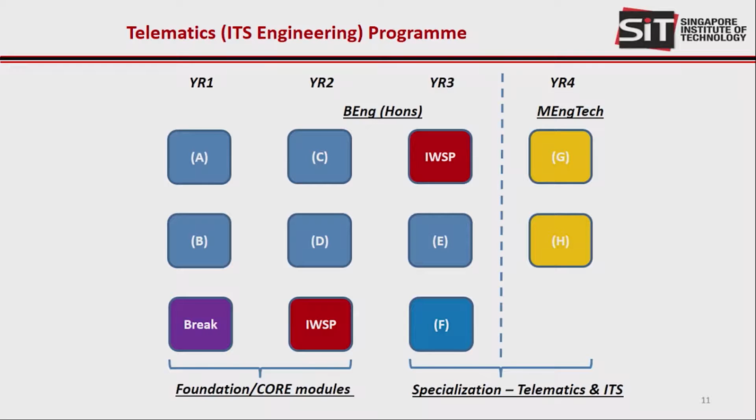Yeah, we want to work with NI. Basically, NI provides an integrated solution of hardware and software, which is very useful to develop many modules for the telematics program, such as signals and systems, embedded system design, and wireless communication.

And also, NI has many industry partners, called NI partners. Our students can work with NI partners for the IWSP and also for various projects, and the students can develop innovative products and solutions for these companies.

And also, our students will get training to obtain the LabVIEW certification, which is an internationally recognized certificate, and they will get relevant industry experience. We are going to sign an MOU with NI later today.

This MOU covers quite a number of important topics. The first one is certification and software. Basically, NI will provide training for the LabVIEW Core 1 and Core 2, and all students will go for the CLAD and CLD examinations. SIT will be the first university to set up a LabVIEW Academy in Singapore, and also the first university to have students go for the CLD exam.

NI will also organize technical sharing sessions for our faculty and students. NI will sponsor industry awards for students doing well in their projects using LabVIEW. NI will also support SIT programs such as the dual study, IWSP, and capstone projects through the NI partners. Thank you very much for sharing, Prof.

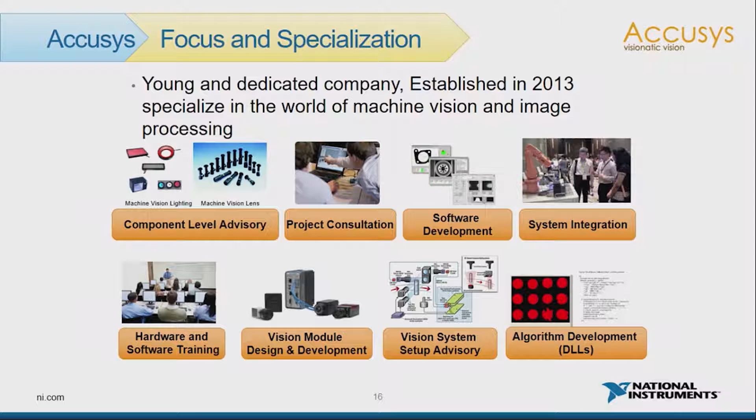Thank you, Winston. Within 3 years, you have managed to build such deep capabilities in machine vision. This is truly impressive. Would you be able to share with everybody an application you developed recently, and what were some of the challenges you experienced?

So we have one of the projects we've done recently that I would like to share. We have a customer who makes electrical grooming products, for example electrical shavers, electrical trimmers. Before the assembly process starts, parts need to be lubricated by dispensing lubricant on them. The challenge faced by the customer was that the whole process was being done by human workforce, which introduced a lot of human error into the process. Other than that, the manpower also limited the production throughput of our customer.

Our task in this project was to automate the dispensing process by implementing robotics vision. There were some challenges we faced as well. For example, the deployment error was actually very high with human traffic, there was unfavorable ambient light disturbance, and we had a very small deployment area. We were also given a very short development time, and we encountered some communication issues with the robots.

These are truly challenging times. So Winston, what is the solution that you actually developed, and how did you manage to overcome some of these challenges? Yes.

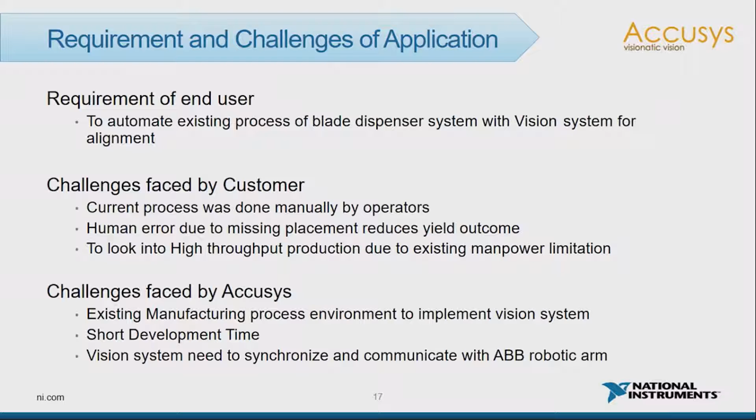Our solution is to choose Vision Builder from the NI Vision platform together with LabVIEW. The software we have written runs within the CVS controller from NI. This controller is responsible for image capturing, image analysis, image processing, I/O synchronization, and TCP communication with the robots. So when the result is ready from the CVS controller, it will send a string of TCP phrase to the robot, and the robot will perform the dispensing action.

Thank you very much, Winston, for sharing with us the configuration of the application you were describing earlier. I must also say that this slide is one I like pretty much. It has the NI Compact Vision System, the NI LabVIEW software, and the NI Vision Builder for automated inspections, which is a script-based configurable software that NI provides to engineers and scientists who want to rapidly prototype machine vision applications.

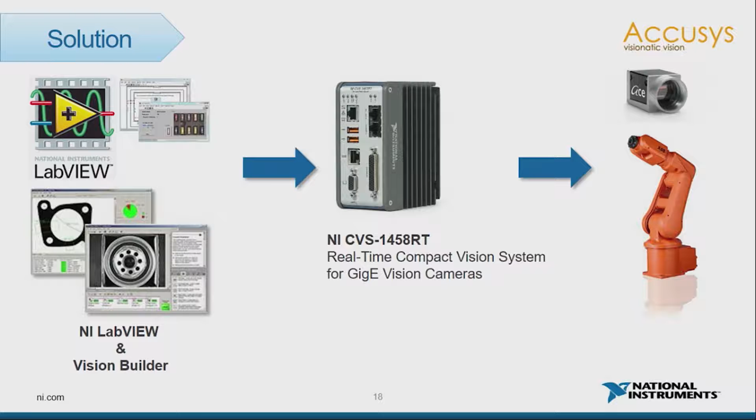Having shown this, do you have a video to show the audience about how the physical system deployment looks like? Sure, in fact I have two videos here. You can already see the image has been captured, the result sent to the robot, and then the robot performing different dispensing actions onto the unit. One can notice the same program is applicable to different parts, different models, and different unit counts on the tray. This is on two different occasions, but with the same system.

When we place the unit, the target, onto the tray, we capture and then analyze all the positions of the unit. This is a screen of the VBAI deployment.

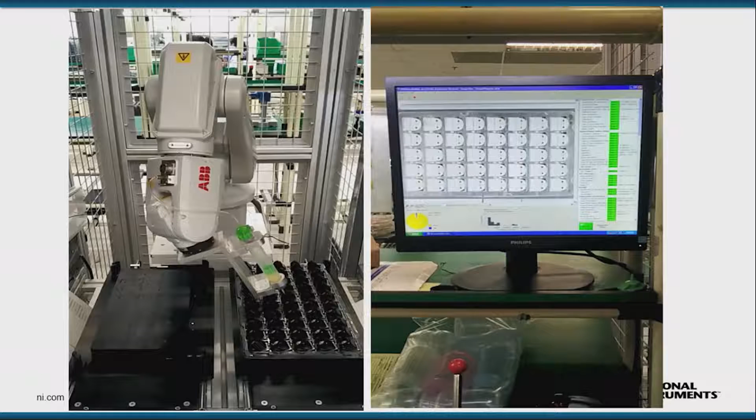I see, thank you very much, Winston. I mean, you are really great — I asked for one video, you show me two videos. With all the complex systems we've seen in this video, I am very sure there are challenges you face while developing it. Will you be able to share some of these challenges you face specifically when working on this application?

As you can see from the video, the vision processing part is performing pretty well, and we are able to cater for all the different parts. But we do encounter one challenge whereby we need to send a very long TCP phrase to the robot side. These phrases differ in length from model to model — about 1,000+ characters — and need to be in a very specific format to be recognized by the robot. The phrase consists of, for example, a header, model information, unit count, followed by maybe 50 or 80 parts of pass/fail information, XY location, angular rotation of the part, and ends with a footer. To do this in Vision Builder is actually a very tedious project.

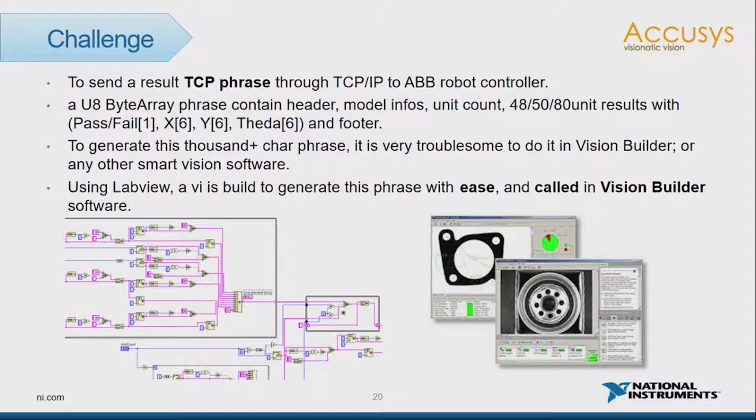In fact, to do this in any smart vision software is a very tedious process. Our workaround was to implement a custom VI function from LabVIEW that we built, and job done. This step actually took us around 20 minutes to develop this custom function. So by using the NI platform, we achieved a very great time saving in development time, from months to weeks. In fact, the vision part you saw in the project just now was done within a week's time.

The next point is one thing I really like about NI. From my point of view, NI is one of the few companies that provides customers with a development environment — namely LabVIEW, a Vision SDK named VDM, and Vision Builder in the NI ecosystem — and also vision processor hardware. So as a vision system developer, this felt like a complete combo meal ready for us.

Next, I also have one piece of feedback from our customer that I'd like to share — he mentioned that the automation system helped us improve our yield and reduce human error. In future, we are looking to expand such a system to other processes.

Winston, at this point in time, I'm very tempted to ask you the next question. Can you share with everybody how the NI platform has enabled you to attain a competitive edge in the industry?

Yeah, so there are a lot of different third-party products or competitor products out there. It depends on the nature of the project — we might choose VDM for that project, the Vision SDK, or Vision Builder for that project, which is actually a smart vision software.

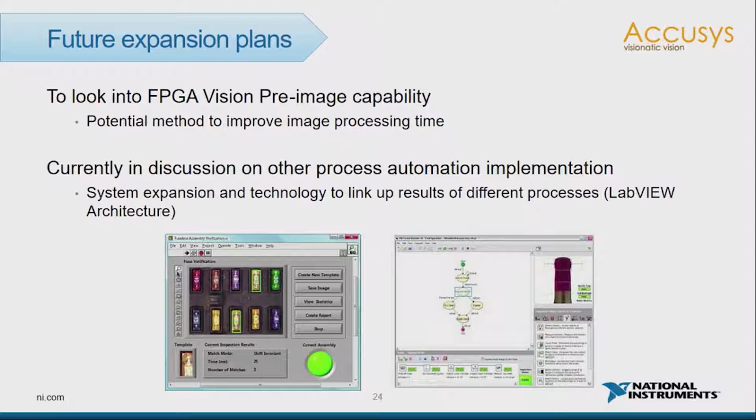Now, the third speaker that I would like to invite on stage is from ARTC - Advanced Remanufacturing Technology Center, or ARTC for short. It is a platform built upon strong partnerships across the supply chain, complemented by technical support from research institutes as well as academia. Purposely built facilities, underpinned by world-class research expertise, hope to help rapidly develop solutions that can enable this technology to be deployed into industrial production.

So with that, I would like to invite Dr. Chen from ARTC to share about one of his latest applications that ARTC is working on.

Hi, Orange. Good afternoon, Dr. Chen.

Hi, my name is Chen Fang from ARTC. Right, very nice to have you here, Dr. Chen.

Now, before we jump straight into what are the challenges that industry are facing and how ARTC are coming in to work on it, can you also share with us a little bit about the mission statement of ARTC, and also a little bit about ARTC in general?

Sure, my pleasure. ARTC is a business model, both private and public. We are under A-Star in collaboration with NTU, and we are also working closely with our industry members like IHI and Rolls-Royce. Currently we have 42 members which cover both the technique end user and the provider. We have 5 main teams: repair, restoration, surface enhancement, robotics, additive manufacturing, and product verification. Currently we are working closely with NI mostly under product verification, developing solutions of inspection, machine vision, NDT, and other measurement projects.

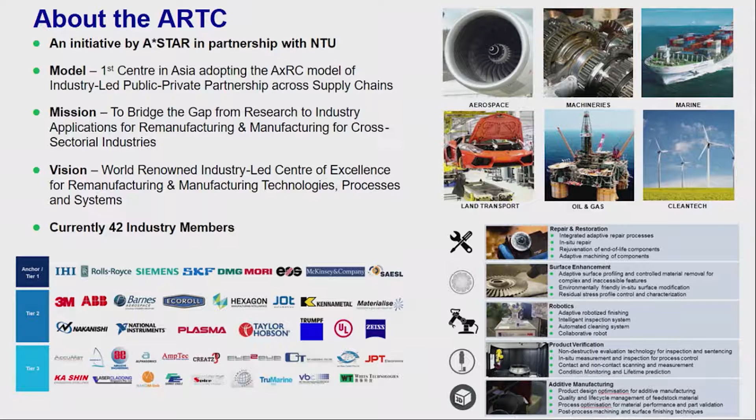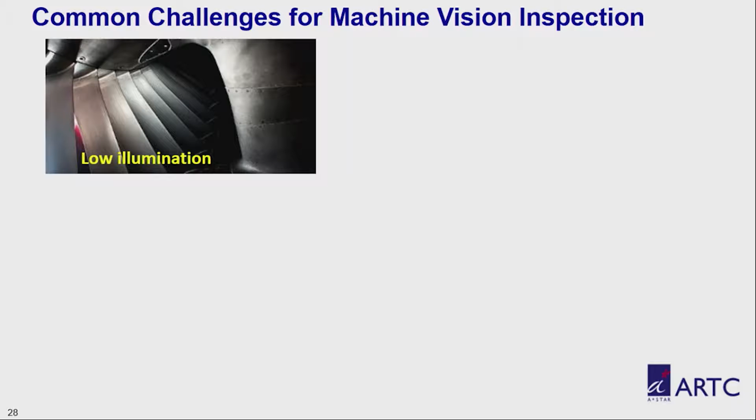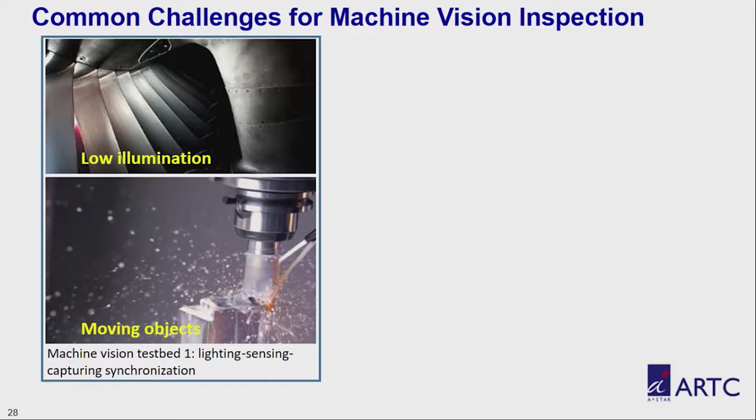Because we are serving so many industry members, today I'll share some of the common interests from our industry members. For example, for machine vision, we have common challenges if the illumination is low, or if the object is moving, it's even worse. So to settle these problems, we are developing our test bed 1 to synchronize the lighting, the camera, and other sensors into one system.

Sometimes we feel it's quite important to replace human sensing with our algorithm, meaning we do some artificial intelligence work. Human beings sometimes make very reliable decisions, but sometimes subjective ones, so we need to transfer the knowledge from experienced technicians to our system. Human beings are quite clever - we know this image is a very poor quality image, but we know where is black, where is white. But we need to do the pre-processing for the system to do machine vision image processing, and it's always time-consuming and needs quite a lot higher requirements on computing power. So based on these considerations, we developed our second test bed to address dynamic inspection with intelligent decision-making.

Thank you very much for sharing about some of the challenges that the manufacturing industry are facing. Now, can you give us a deep dive on these 2 test beds that you just shared with us?

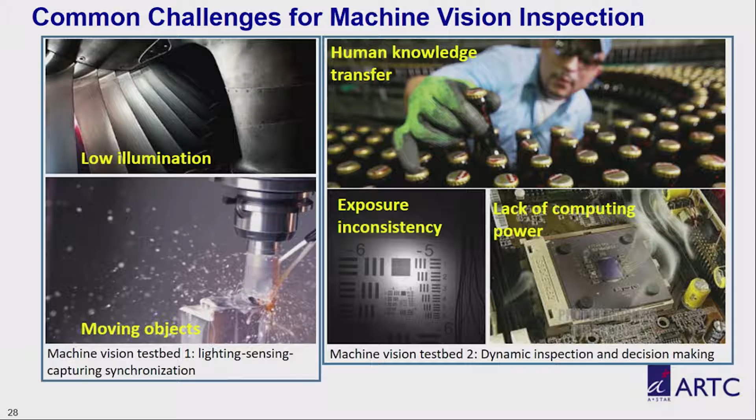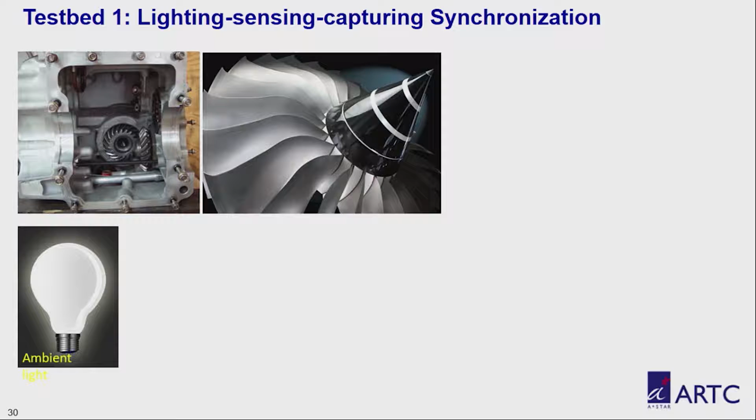Okay, so our test bed 1, we are focusing on synchronization. As you can see in the casing or in the gearbox, sometimes the illumination is quite low and sometimes the object is moving very fast. So we need ambient light for observation purpose or for video taking, and for a high quality image we need some special lighting to make a uniform and very short pulse lighting.

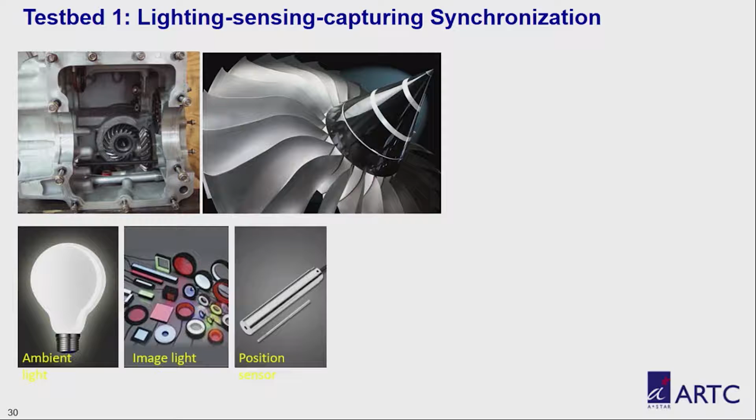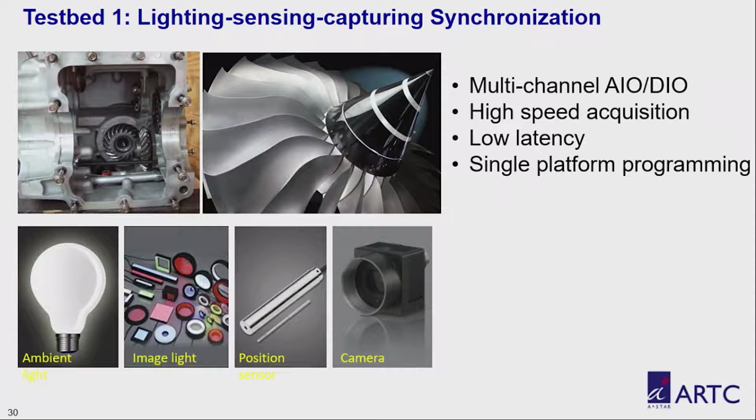And we also need position sensors to make sure during the very short time we capture the image, the object is rightly in the center of our field of view. And of course, most important, we need an image capturing system. We have requirements of high speed, high throughput, and as a developer we always prefer a single programming platform. So in this development work, we use LabVIEW and a portable DAQ system to synchronize everything.

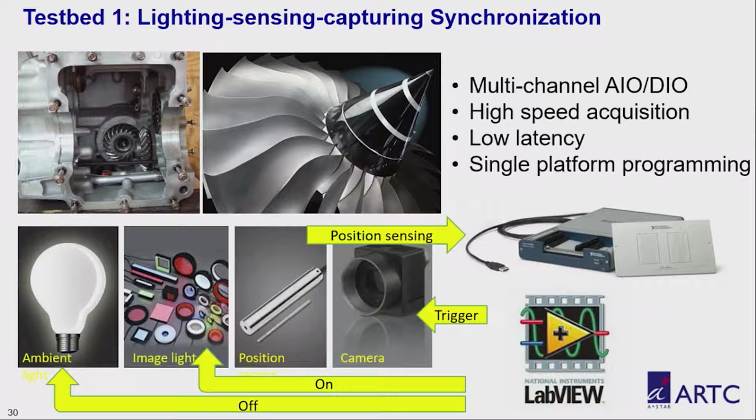The system reads the signal from the position sensor, knows that this object is within our shooting range. Then we turn off the ambient light to terminate the observation mode, then we take an image using the camera with assistance of some special lighting. Okay, this is how the system works.

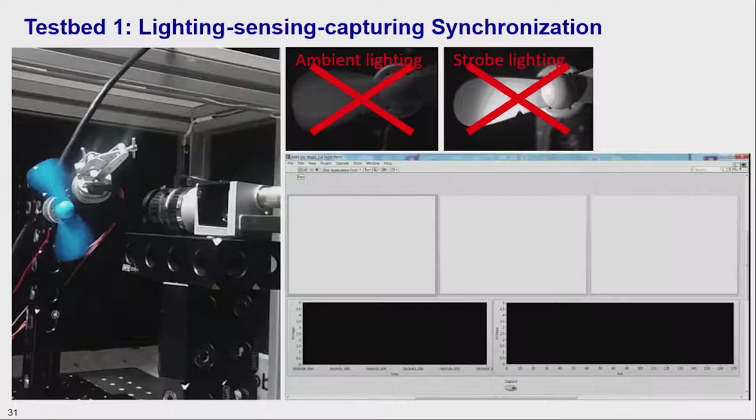If we use ambient light to take an image, the image will be very dark and blurry. If we use some flash directly attached to the camera, the illumination is not uniform. So they are not suitable for machine vision, for image processing. We need some specially reconfigured lighting system to give us a high quality image.

This is how the system works. As you can see, we terminate the observation mode, then run the image processing mode. And another software panel will show you how we take the image.

Okay, this is the video. Every time the image is taken, the center of the object is within the central area of the image. That means our position sensor works. And as you can see, in real time, the defect can be detected. So all the sensors, multiple lightings, and cameras are synchronized in this system.

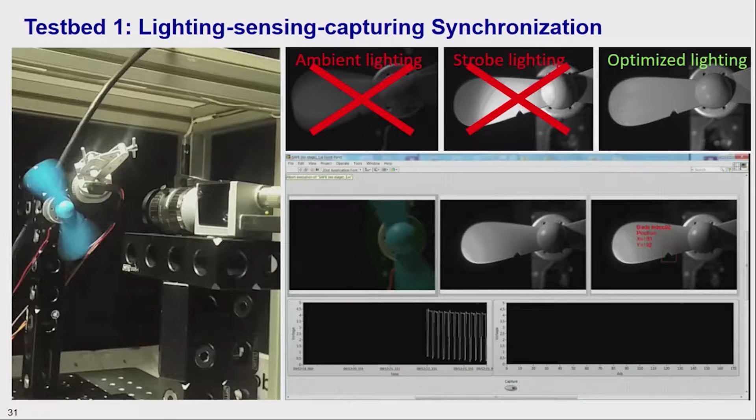Very nice, Dr. Chen. Now you are going to go about test bed 2 - I realized that one of the differences between test bed 1 and test bed 2 is that there's intelligence in test bed 2. Yeah, so for test bed 2, we are pursuing not only to be fast, but also to be smart.

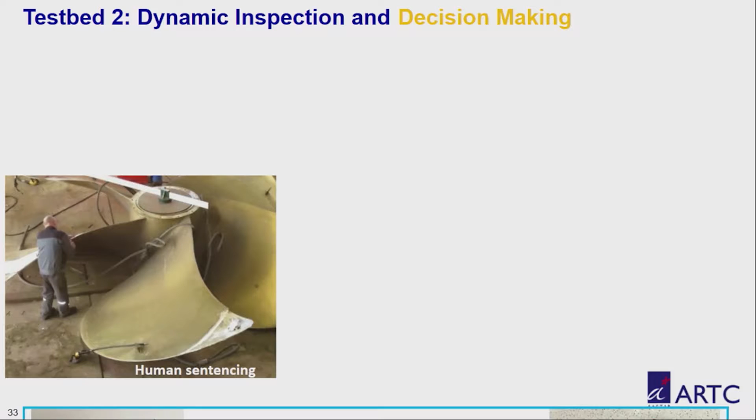Okay, as you can see, this is a common story of human sentencing. This technician can be very experienced. Using his eye, he knows which samples to be accepted or rejected. For example, if the surface is perfect, we accept that. If the surface is full of these corrosion dots, we reject it. And sometimes the cases are in between - we should make decision whether it's worth repairing or not.

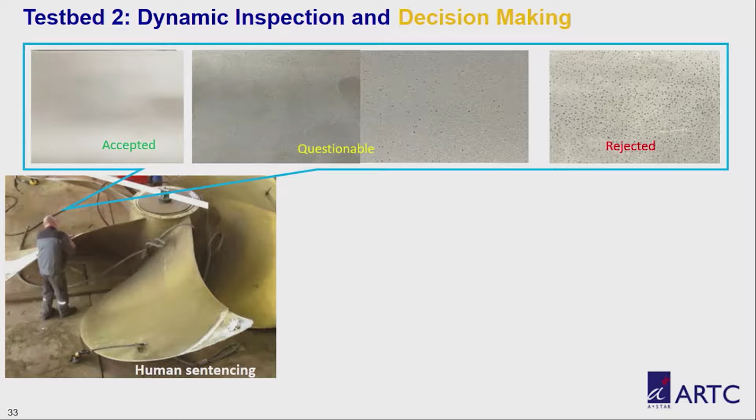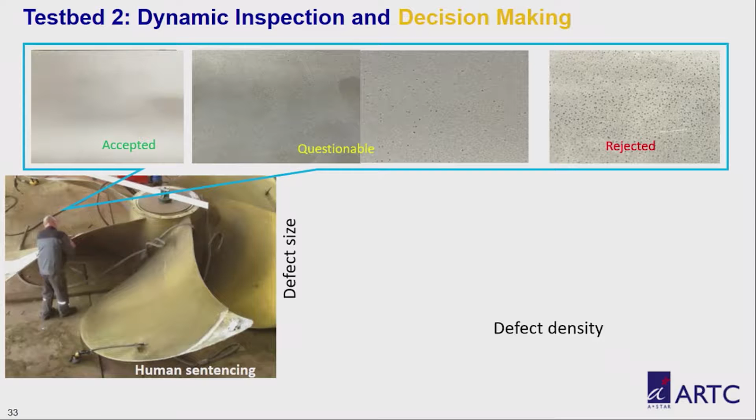So we need to transfer the knowledge from the human being, the brain, to our algorithm. We extract two key parameters, which are the defect density and defect size. As you can see, the yellow points mean we can accept that, and the red cross means those cases we should reject. This is the decision made by the technician.

As you can see, the triangular area is what we draw using our algorithm, meaning this area is the acceptance role. And be careful, on the bordering area, we have some outliers there - that means our human sentencing is not always consistent. Right, okay.

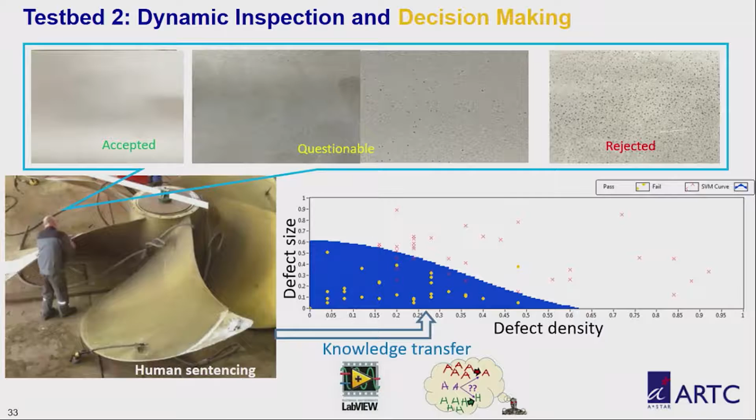To be clearer, these criteria can be translated into different failure modes, which shows a clearer physical meaning. As you can see, we can separate that into a 4-cell matrix. Firstly, if the defect density is low and defect size is small, we accept that.

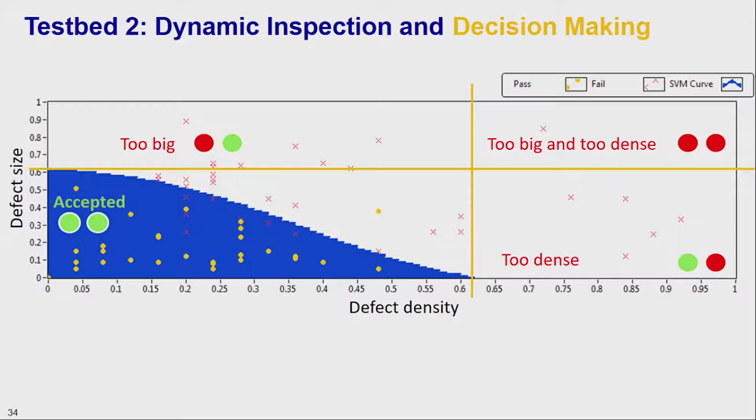If it's too big, no matter how low the density is, we reject that. If the defects are too dense, no matter how small they are, we reject that. And if both dense and big, we reject them. We have a special area in this triangular region - we reject it because we feel uncomfortable. Why uncomfortable? It's fairly big and fairly dense.

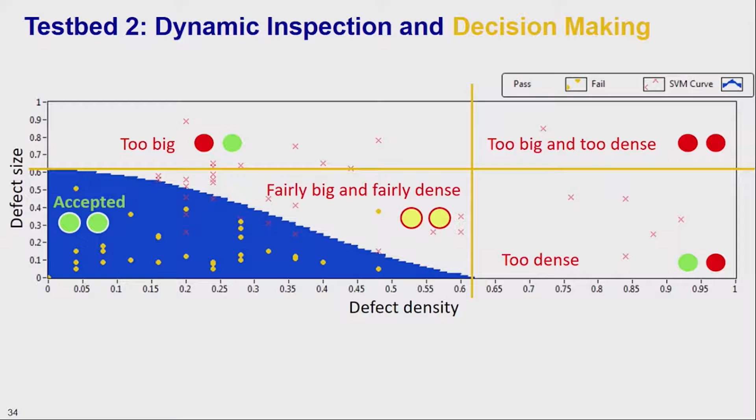Okay, so these are two setups of the system. As you can see, we use the FPGA technique to do the pre-processing of the image, because we know image processing is always very heavy computation work. So we can use the industry camera, but of course we can also use smart camera.

Using the FPGA, we do image pre-processing - we reduce the noise level, then do some normalization of the image, and the host system can do decision making, can do the real-time display. But of course, here we use smart camera. Sometimes we can even make the decision within the onboard camera.

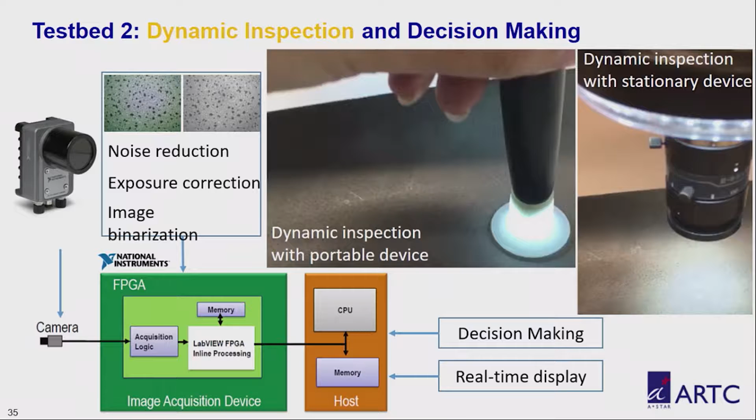So this is how the system works. Dynamically, we move the sample or move the inspection system. Then we show the results in real time. As you can see, we have already defined 4 typical failure modes here.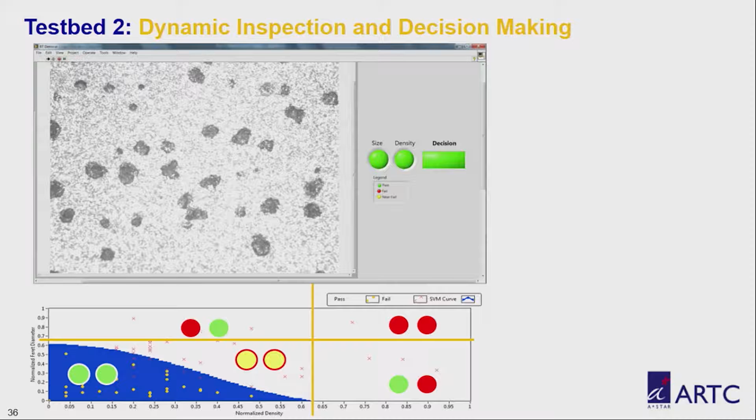We use FPGA, we use LabVIEW to package the program into an installer. As you can see, the two traffic lights show you whether it's too big or too dense, or fairly big, fairly dense, to cover the 4 typical failure modes and make the decision whether to accept or not.

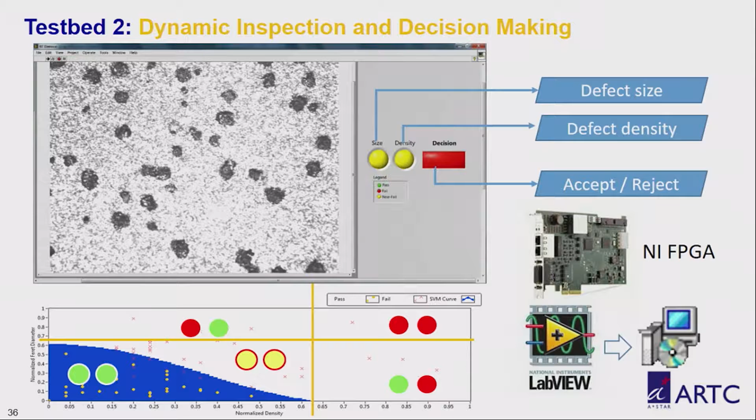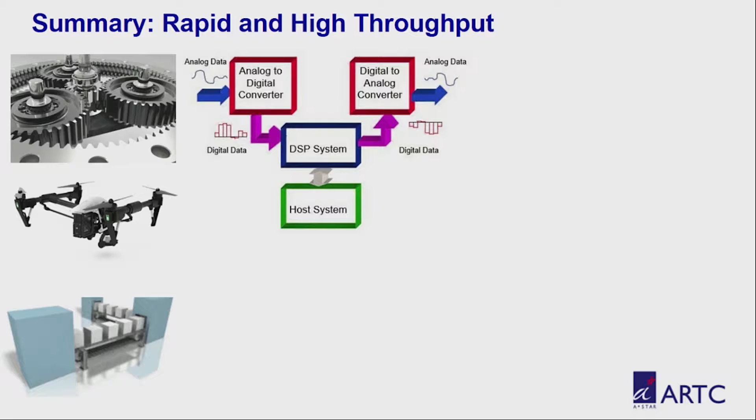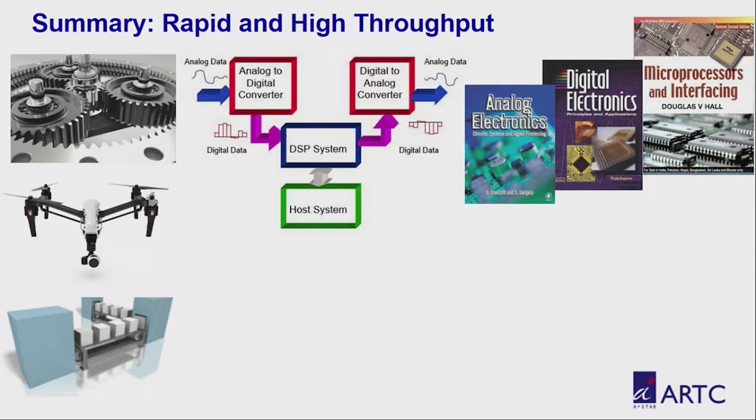Right, yeah. So as a summary, we are pursuing high speed and high throughput in many industrial areas. Traditionally, 10 years back, we needed to learn so much knowledge - as a mechanical engineering student 10 years ago, I felt very proud of all of it. So today we can use a single platform, so we make sure our scientists and engineers can focus on their own strength instead of the background knowledge.

Thank you very much, Dr. Chen. And as he has said earlier, I think one of the points that I'd like to reiterate is that NI comes in to really help ARTC abstract the complexity of developing the system so that the engineers and scientists in ARTC can really focus on the real research stuff.

And also, I'd like to add that in both test beds that ARTC is working on, there are very complex systems trying to synchronize data measurements and inspections in real time. And we are very happy to say that NI can actually help ARTC achieve that.

And with the buzz of Industry 4.0 and the cyber-physical systems, and also the factory of the future, we really look forward to working very closely with ARTC to address some of those new emerging technology applications. So with that, thank you very much, Dr. Chen. Thank you, Raj. Thank you.

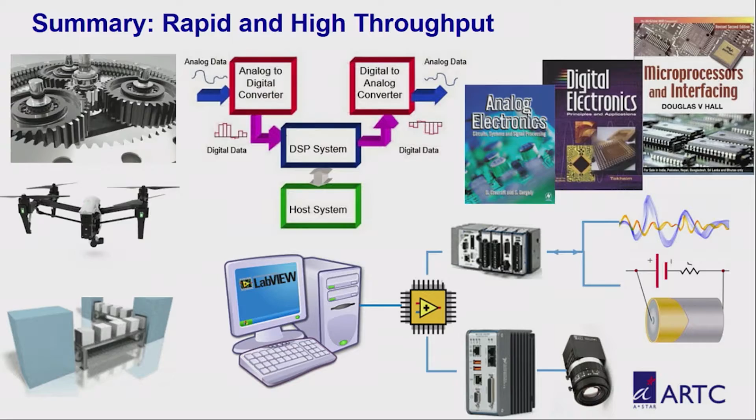Before that, I wanted to share that in today's world there is a growing interest globally to develop renewable energy technology. In order to mitigate climate change, there is a need to reduce the carbon intensity of the global energy system, and this is done by adding clean, renewable energy sources such as solar power. That is exactly what SERIS has been doing right here in Singapore all this time.

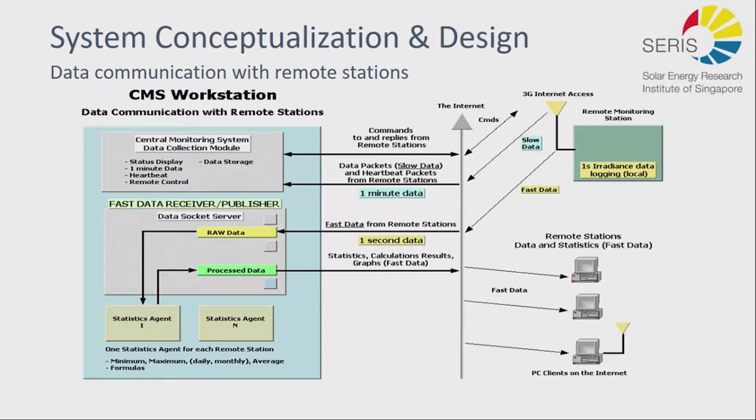So these are the main features, plus of course the remote stations should be intelligent enough, smart enough to allow us to connect to the station, upload scaling coefficients, enable or disable certain sensors and measuring devices. On the backbone at SERIS, we should have the ability to collect data, process data, share data, and generate customized reports. So we are doing this and sharing the data with SERIS research teams as well as with SERIS customers.

Thank you very much, Mark, for sharing. It is good to know that the challenges and requirements were identified early, well before any important decisions were made, which is extremely important for design methodology. I also know that the solution of choice is the NI hardware and the NI software.

And you have been using the NI Compact RIO Industrial Controller and the NI C-Series I/O modules together with the NI LabVIEW software, NI LabVIEW Real-Time software, and NI LabVIEW FPGA software to program for the central monitoring system and to program for the remote monitoring station.

And so I'm really very interested to know more about some of those applications that you have been working on using the platform. Okay, so the first milestone for the LabVIEW team at SERIS was to develop a network of 25

stations that transmit live 1-second irradiance data to SERIS. This system was completed in December 2013, and this date also marks the birth of the live solar irradiance map for Singapore. We believe this is the first live irradiance map in the world, due to the high density of irradiance sensors in Singapore, as it's a small area.

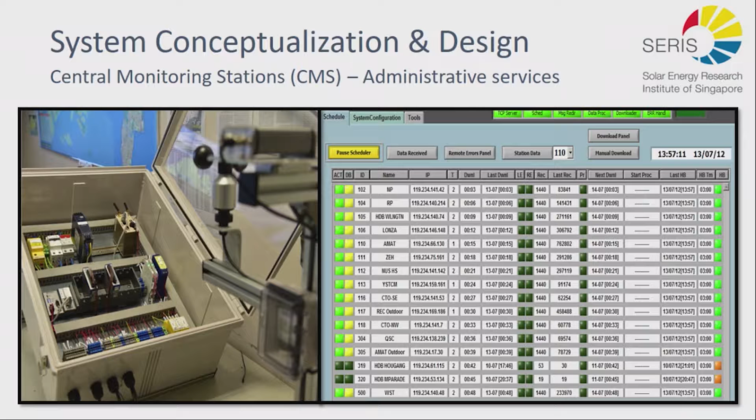So we managed to get the live irradiance map online, which is updated every second. Currently, we have 53 monitoring stations in Singapore, 3 in India, and 2 in Cambodia. Soon, we will be expanding our systems to countries like China, Japan, Australia, and Indonesia.

For the first PV floating system in Southeast Asia, we will be deploying a motion monitoring system of PV platforms using a 6-degree of freedom sensor with Compact RIO and NI C-series modules. We would like to show you a very short video clip of our system, followed by our live irradiance map.

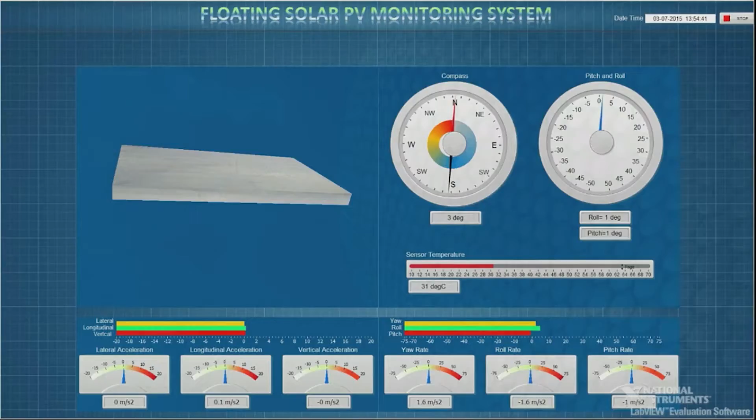This is the UI of our system. The system has a bunch of features. One of the features is able to detect the sinking platform, as you can see in the video. Another feature is able to detect the impact caused by a foreign object.

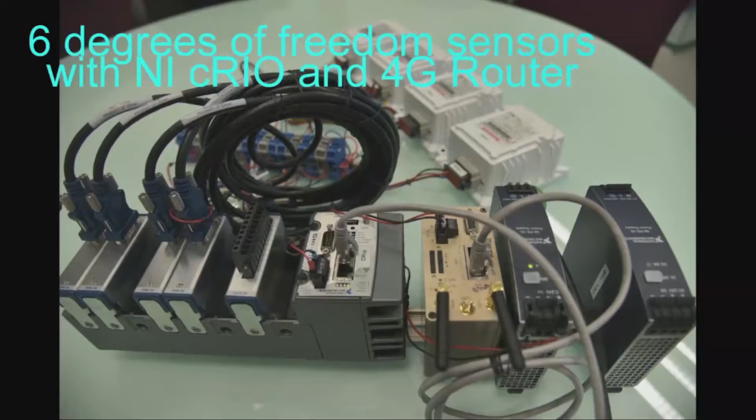So monitoring the behavior of the platform is critical for this first-in-the-region floating PV system. This is the equipment that you just saw that we use. These are photos of the actual site, and the works are being carried out as we speak right now. The system should be online very soon.

Now we are moving into the SERIS monitoring lab. That's how it looks with the video wall, which shows all the live information, and we'll show you the demo. This is actually the user interface of our live system that displays the current status of all 58 stations that are running every minute, every second. It shows the downloaded data if any station has a problem.

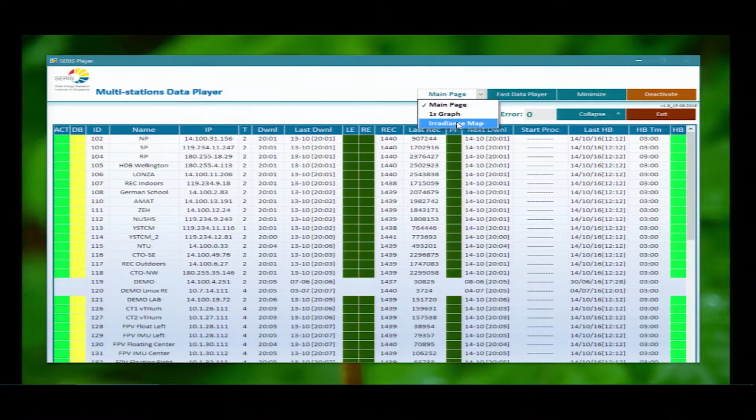We also collect 1-second data, as you saw for the irradiance map, which allows... this is the irradiance map. As you can see, this is being updated every 2-3 seconds. It's live. The same map is available on the website called National Solar Repository of Singapore. You can view this map that is updated every minute. So data is flowing to SERIS, and we're generating this map.

Now we will show you live data from SERIS' own meteorological station located on the roof of our building. You see selected parameters being shown on the graph, and data is being updated every second. Everything is through NI Compact RIO and our backbone that is collecting the data.

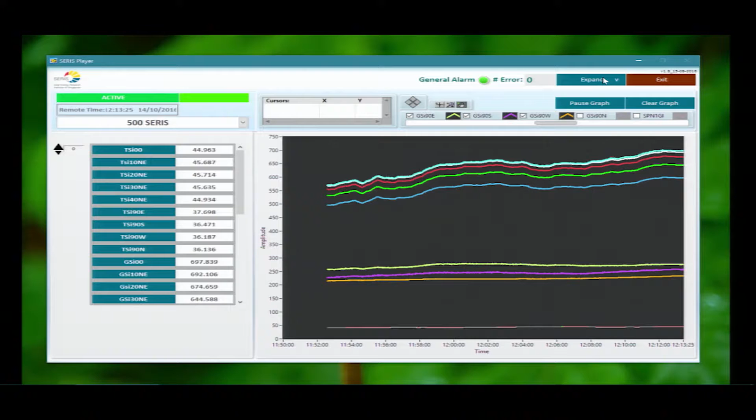Now, that is really a very impressive demo. But I also wanted to say what is even more impressive is that it came to my understanding that the team consists of just 2 persons. And both of you have basically created a platform using NI to support so many of your projects and applications. So tell me, how has that worked out for your benefit so far?

It worked very well. From our initial experience, we actually started with industrial PC-based remote stations. That was the initial design. But then we found out that LabVIEW, RT, and NI CompactRIO provide much higher reliability. We don't have so many failures. Actually, it's a very robust system. This system is much more robust, much more efficient, and easier to program.

The great advantage, forgot to mention, we have 99.5% data availability. This means something, right? How reliable is the system? The great advantage of using National Instruments hardware and software as a platform is the wide range of input modules for various types of signals that we connect, as well as the variety of communication protocols, because our system relies heavily on communications. We have this with the NI system. It's there.